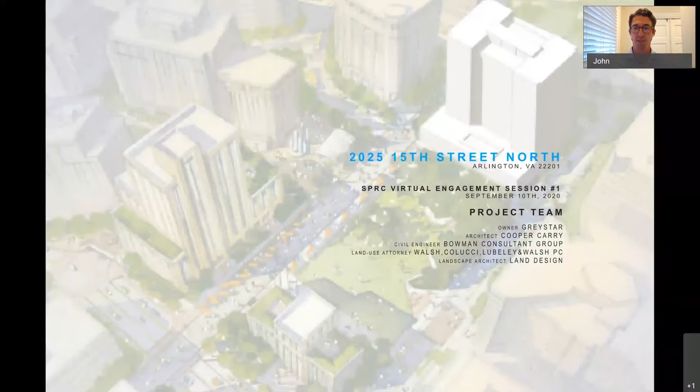This is the first of 2 online engagement sessions in the new SPRC process. Also posted on the county website is the project overview presentation we've prepared, alongside materials from county staff, to help you understand the project and our design approach in light of the county's planning goals. We're looking forward to this being the first major 4.1 site plan process under the 2015 Courthouse Sector Plan's Courthouse Square Addendum and the provisions for the Courthouse Square Special District under the CO zoning district. As we embrace the changes to the public review process in the wake of COVID, we look forward to your feedback and continued engagement as the process unfolds.

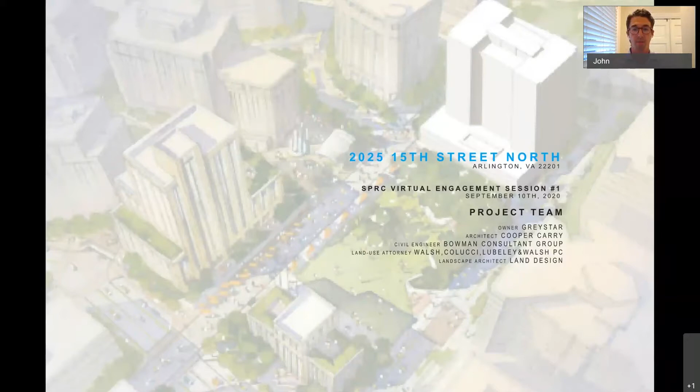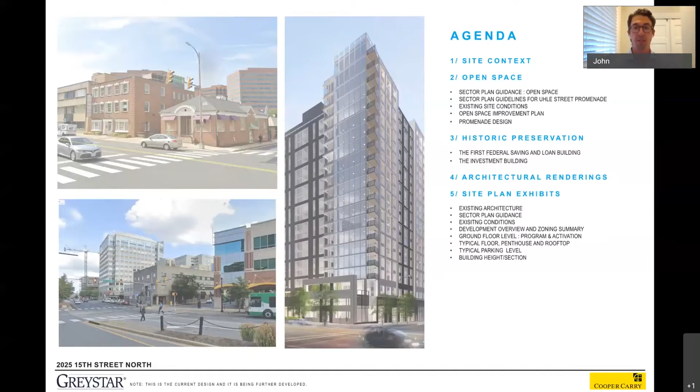In this presentation, we're excited to provide a more detailed discussion of 3 areas: open space, historical preservation, and building architecture. Joining me later will be Steve Smith, a principal with the architecture firm Cooper Carry. As you may recall from our project overview, the county's comprehensive planning documents, most notably the Courthouse Sector Plan, guided the design for this site. We'll revisit some of those slides for context and present new slides that dive deeper into the project's design.

Our project is 2025 15th Street North, also referred to in the Courthouse Sector Plan as a landmark site. We're proposing a full redevelopment of the entire property, an assemblage of 9 parcels. The site is centrally located within the Courthouse neighborhood, across Uhle Street from the Courthouse Metro, and stretching west to North Courthouse Road.

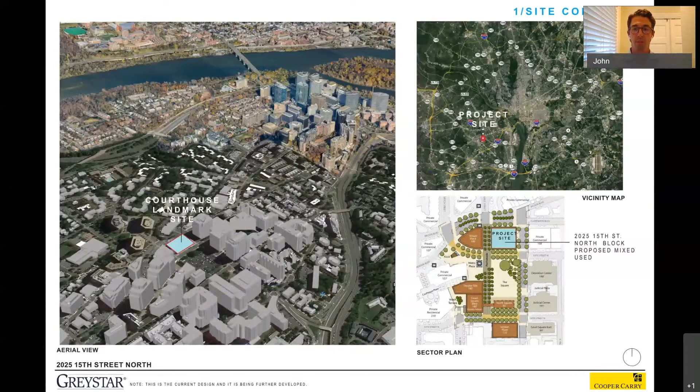The sector plan provides guidance for open space, specifically a grand vision for the future of Courthouse Square, wherein the existing parking lot adjacent to the government center and courthouse is transformed into a lively public square with trees, sidewalks, and seating areas. The plan also envisions a major pedestrian promenade to provide connectivity from 14th Street North to the south.

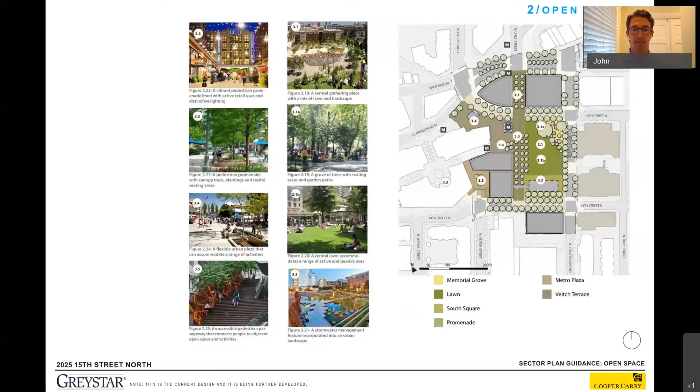Our component of this new network of open spaces is the Uhle Street Promenade, intended to become a vibrant and broad pedestrian walkway lined with trees, active retail uses, and distinctive lighting. Our landscape architect, Land Design, has put together a plan for an engaging and dynamic space within the Uhle Street Promenade, drawing inspiration from the sector plan's comprehensive guidance for Uhle Street, as well as other examples of pedestrian spaces regionally and nationally.

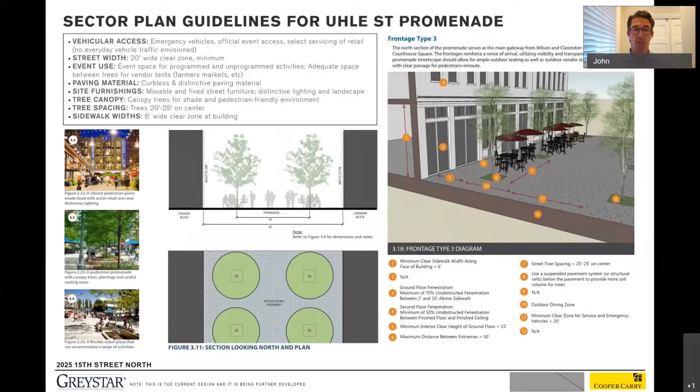While the sector plan provides a comprehensive vision for this promenade, we've discovered through site design and engineering some challenges with strictly adhering to the plan's recommendations. The 2 most notable are an existing underground transformer vault and an approximately 4-foot grade change from north to south.

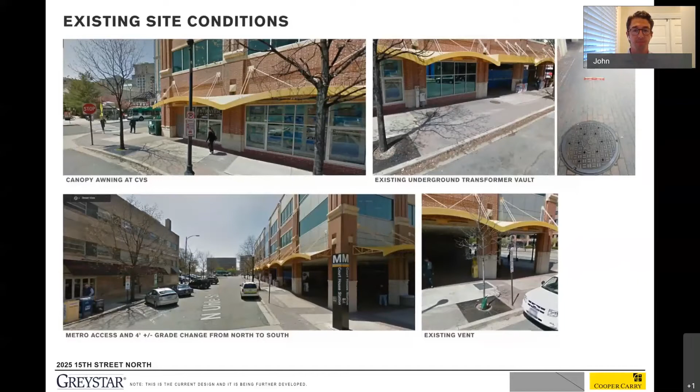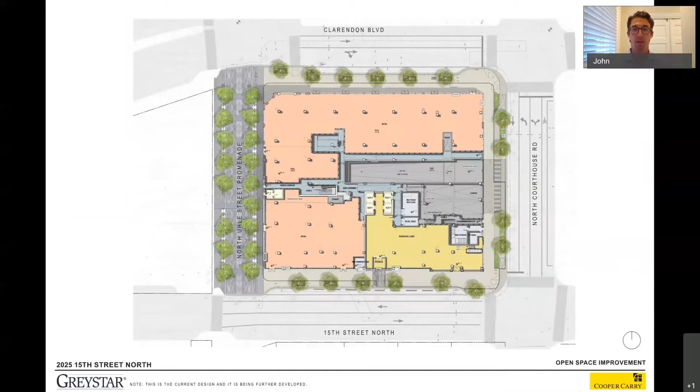This image depicts the ground floor of the building and the adjacent promenade. Per the sector plan, retail uses will front along the length of the promenade, providing activation of the space. A retail elevator lobby with doors opening directly onto the promenade will provide access to the parking garage below. Making this space active and engaging is our highest priority, and we believe the team created a design that will ensure the success of the retail.

Our goal is to activate this area with retail while still providing ample public space. To accommodate the significant grade change, we've proposed 2 terraces for the retail use, which will help capture the grade change as one moves across the space. To accommodate the existing transformer vault, the proposed pedestrian promenade has a slight bend, creating visual interest as well as a more dynamic and inviting experience.

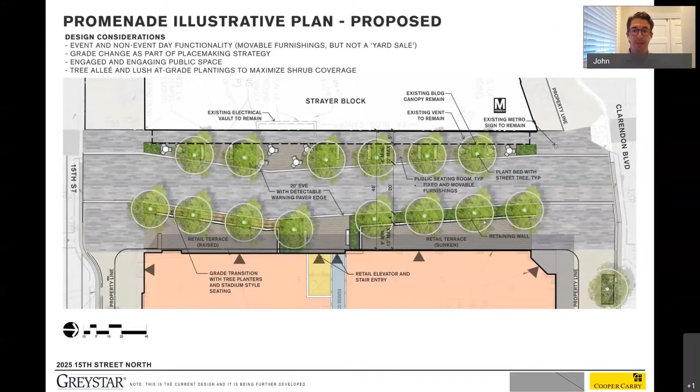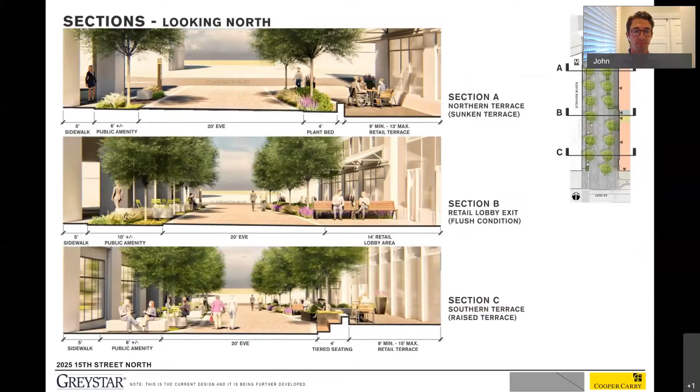This slide is a rendering of our promenade looking north. You can see the two retail terraces and the grade change going down Uhle Street. This is a rendering of the promenade looking south, where the metro will enter onto the promenade and gladly invite people to use the retail.

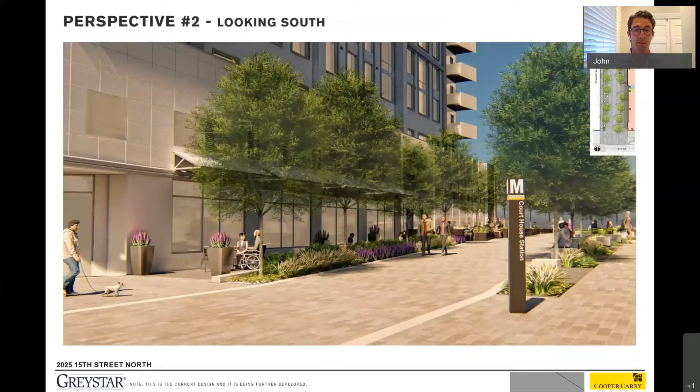I will now pass it off to Steve Smith, principal at Cooper Carry, to discuss the proposed building design and historical preservation elements.

As we collaborated on how to develop a building on the site, we explored numerous layouts to provide a visually interesting yet efficient and flexible plan with massing that responded to the site and its context. Reacting to the prominence of the site, we then sculpted the mass to create four vertical expressed corner towers that added an elegance to the building's proportions.

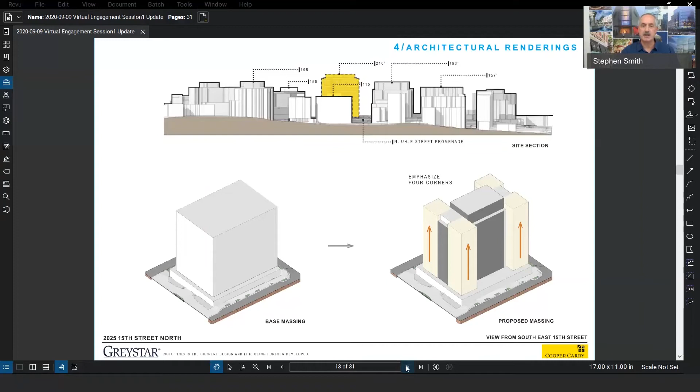These vertical reading towers could then be viewed from all directions. We set back the building tower between 10 and 40 feet at various points on the second level on the north, south, and west elevations to consider the pedestrian experience, and to reduce the overall feel of a 20-story building coming to meet the ground. This setback move allowed us to preserve some of the historical facades from Arlington's original financial district and law offices, which I'll talk about next.

Let's look at the two major historical buildings on the block that we have incorporated into our design. In working closely with Arlington County's historic preservation staff, the design team researched the history of both buildings and have documented them as they stand today.

The first building is the First Federal Savings and Loan that sits on the corner of Clarendon and Uhle, next to the entrance to the metro station. We cannot preserve the building in its entirety, but we are looking to recreate the original 1950 two-story design utilizing the building's existing limestone and marble. The building's original design will mesh well with the proposed building's retail base. Modifications will be made to the First Federal Savings and Loan facade openings along the promenade to allow for a more expansive retail use and pedestrian experience.

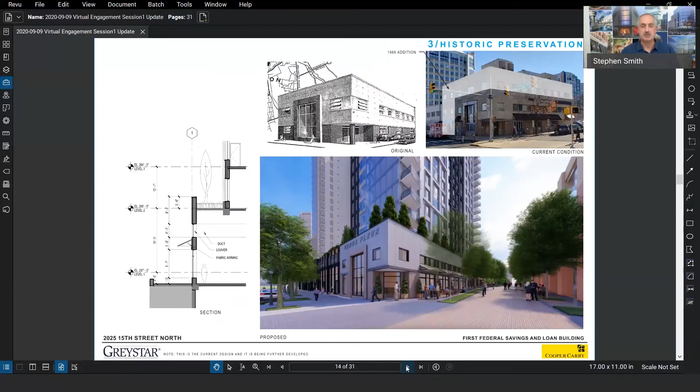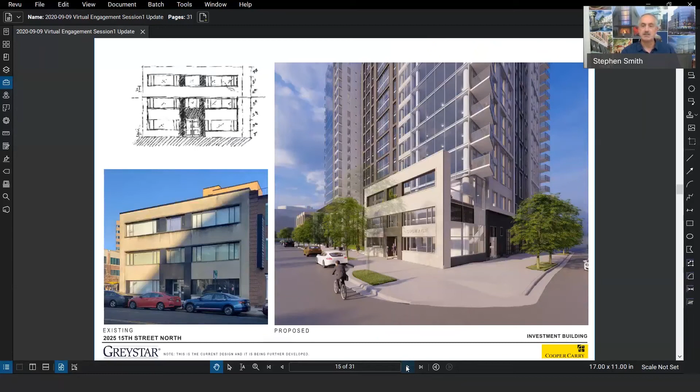The second historical building is the investment building on 15th Street. We'll recreate this facade on the corner of 15th and Courthouse and utilize the original limestone and granite materials from the 1948 structure. This building's third floor glazing has been removed to create an outdoor frame to look through the proposed building's amenity deck.

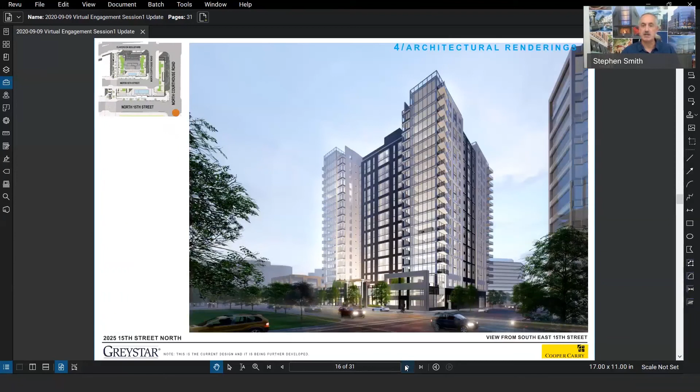Here's a rendering from the southeast corner of 15th and Courthouse with the investment building within the context of the overall development. You can also see the white brick corner tower elements against the darker infill brick of the project, allowing for a more vertical reading of the mass. The brick and glass tower expression occurs on each of the four corners, creating an elegant vertical building that can be viewed from all points of the compass.

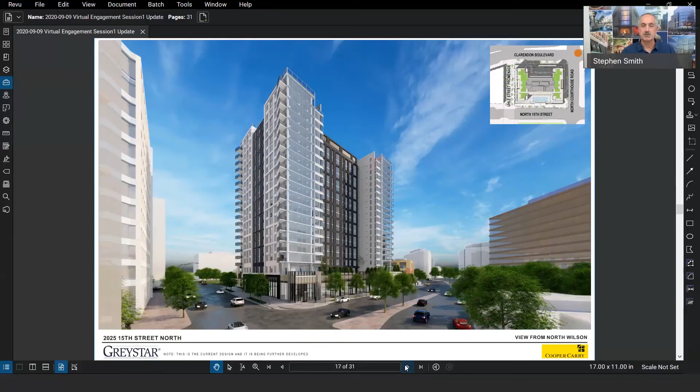As we reach the corner of Courthouse and Clarendon, here's a view looking southwest towards the site across Clarendon and Wilson Boulevards. You'll see that retail is introduced to the project, allowing for continuity of Clarendon's well-known street retail reputation. Our proposed plan has strung continuous retail along the full length of Clarendon, with the tower stepping back at numerous nodes along the north facade, producing a lighter, more enjoyable pedestrian feel at the sidewalk. Again, we're able to see the multi-directional viewable towers with their expansive glazed facades that have views to all of Arlington and beyond.

As we contemplated materials for 2025 15th Street, we turned to brick. Made of natural materials, all of us can certainly identify brick as a primary building block. The individual module of brick also speaks to the scale of the residential use of the building. As a palette, we wanted the building to differentiate itself from the many surrounding beige structures constructed in recent decades. We utilized white bricks at the tower elements so they may read as a clear beacon on the hill, marking the pinnacle of the seat of government for Arlington County, and fitting in well with nearby Arlington civic buildings, as well as the Courthouse Plaza project.

The charcoal brick provides a contrast to the vertical corner towers. The windows have been grouped together in a vertical expression to accentuate the building's upright reading. We also looked at opportunities to maximize views from inside the building by offering large expanses of dynamic, high-performance, and energy-efficient glazing along the entire length of many of the facades. This creates light-filled living spaces.

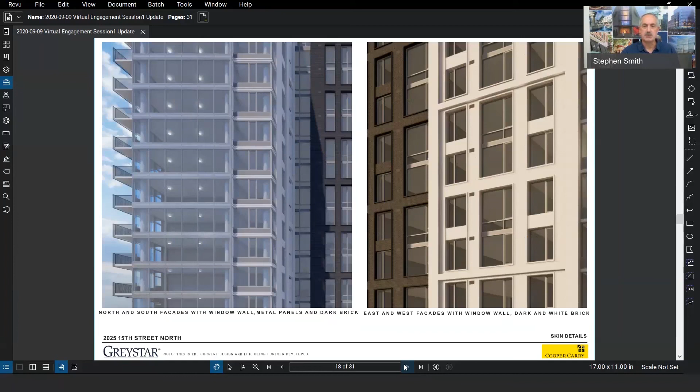This use of glass will also provide views to the north as well as the future park to the south, acting as figurative windows to Arlington and allowing distant views around the county. The glass will take on a variety of levels of transparency and transformation throughout the day due to the movement of the sun.

As you walk past 15th Street's retail spaces, you will approach the mid-block framed entry to the proposed building. This modern, gracious, and dramatic entry portal will provide access to the residential units and is made of metal panels framing the expansive lobby glass facade.

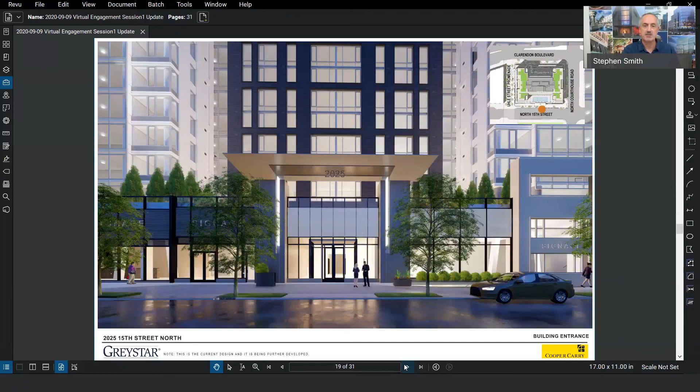Moving up to the second level, we see the tower itself continues to set back, allowing more light and air at the street level while creating a pool deck on the second story that overlooks the future park. People at the second floor of the building will also add interest to the street experience.

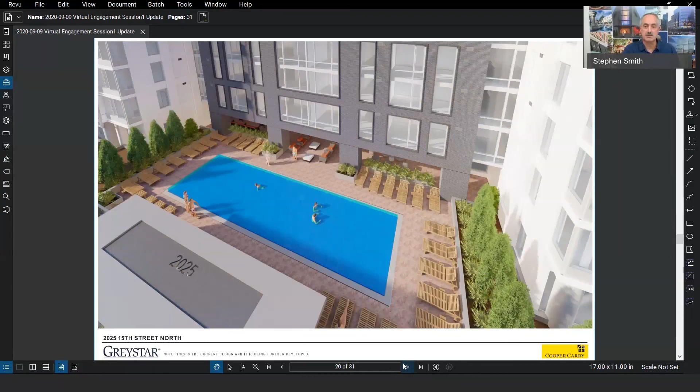Rising to the sky, a rooftop garden is exposed on the building's fifth facade. It allows residents to enjoy the fresh air while taking in views of Arlington. The plantings continue to provide the benefits of the building's biophilic design and capture rainwater, a key part of the building's goal to achieve a LEED Gold certification.